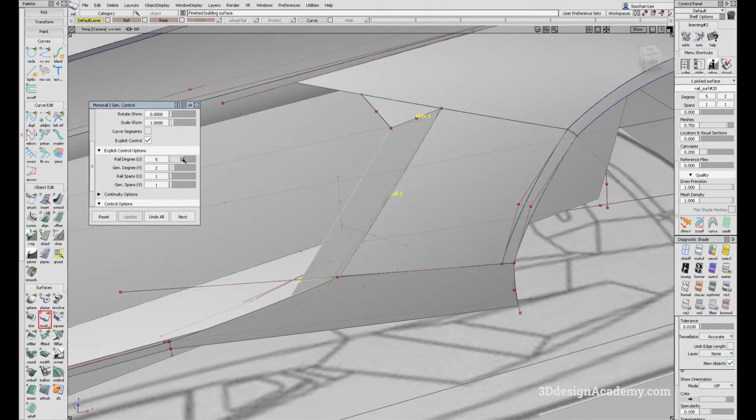So I'm just going to turn rebuild off. I'm going to turn explicit control on, and reduce the gen degree to 2, because that's the maximum degree required since it's created by a degree 2 curve. I'm going to increase the rail degree to 5, and it looks like we achieved position on this one. After that, I'm going to trim this piece over here.

So what I'm going to do is get a rail, just one against the trimmed edge over here, and click on this one over here. Okay, looks like this also has a lot of spans.

So I'm going to do a rebuild. Actually, because we only need it up to this point, I'm going to see if I can do a curve segment and reduce the spans enough. Okay, so it's still degree 2 spans, so I'm going to turn that off and turn explicit control on.

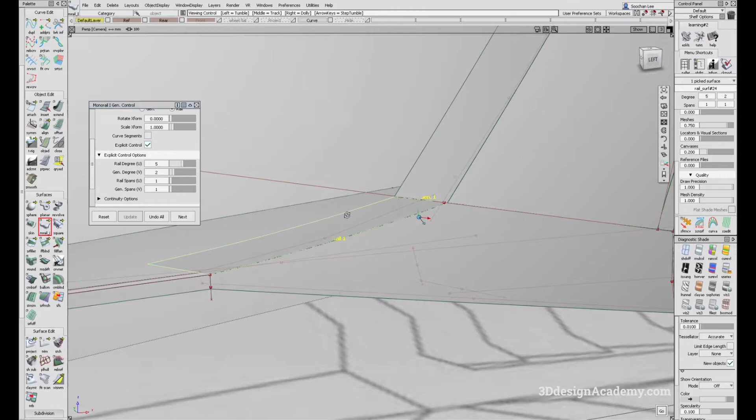If that's the case, I'm pretty sure it's okay to just extend it that way. I'm going to turn curve segments off, and I think the angle is okay. So I'm just going to grab a curve and change this to degree 2 like this.

I'm going to snap a curve over here, create a curve right here like this, trying to match the angle as much as possible. I think there should be a slight crown.

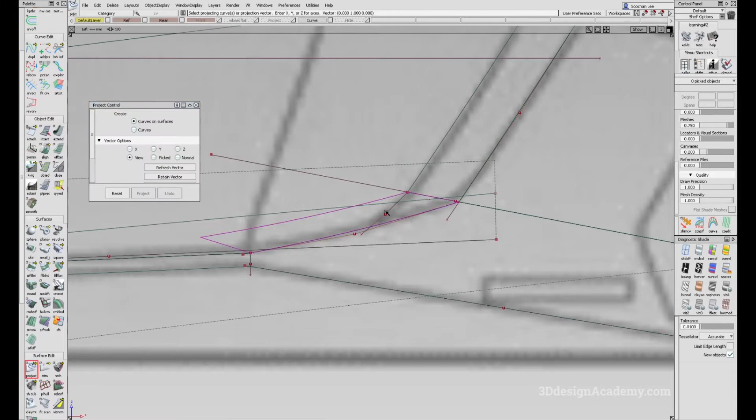Just a minor one. I think that looks good, and I'm going to project like this, and trim. Okay, I think that looks pretty good. Of course we might have to adjust it later, but for now it's okay.

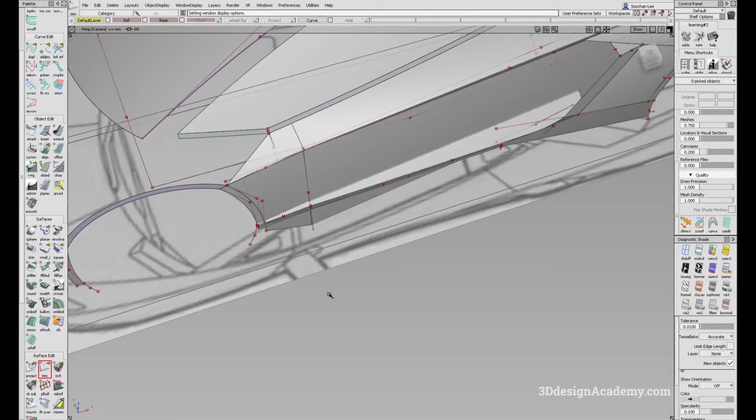Okay, so the next step, I need to create this piece over here. So what I'm going to do is, well, this probably needs to be divided also. This does complicate things a little bit, but I think this is probably a good division point between this surface and that one. So let's try to create a surface there.

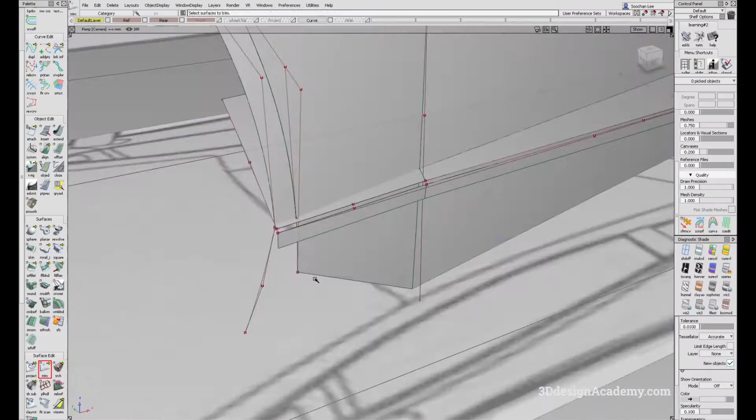Okay, so here's what I'm going to do. Right now we have a curve here that's supposed to mimic the side view, but I don't think I actually need to— actually, you know what, let me just leave that as a projection curve.

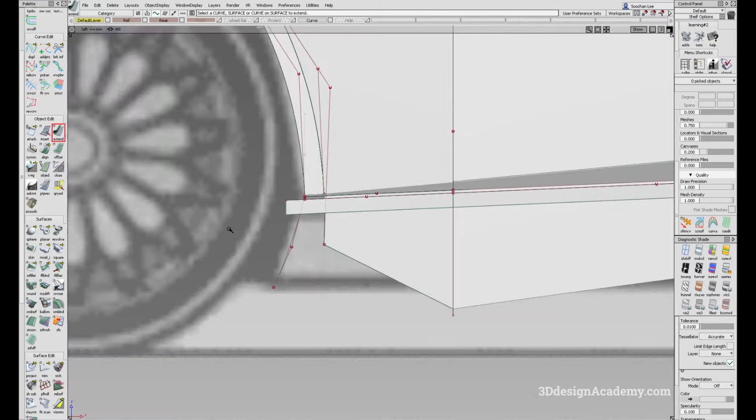So what I'm going to do first is, let's see, I'm actually going to extend this curve just a little bit like this. And I'm just going to project this one like that, and trim. I think that looks good.

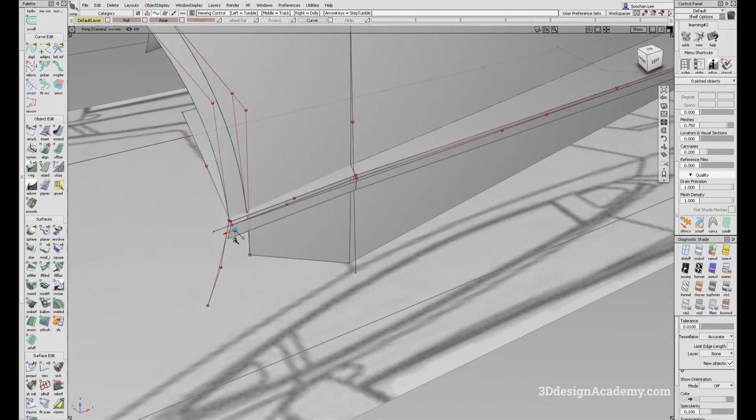And for the next piece, this piece right here, let's take a look at this angle. Right now it's curved in, tucked in quite a bit. So what I'm going to do is, actually, you know what, I'm just going to use this section over here. So right now— oh, actually there's no section over here.

So that's okay. What I'm going to do is create a curve like this. It can be a little bit lower, that doesn't really matter. And because right now there's a little bit of crown on this surface, I'm going to give it a little bit of crown too. Using the stretch tool, I'm just going to tuck it in.

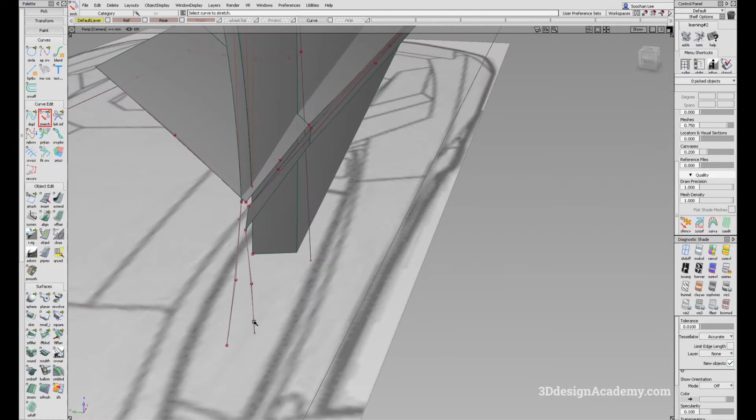Why isn't it working? Okay, so I'm just going to tuck it in like this. I'm just going to create a rail on this piece over here. Right now it's looking okay, but let me just trim these pieces over here so they're not in the way. So I'm just going to trim that one.

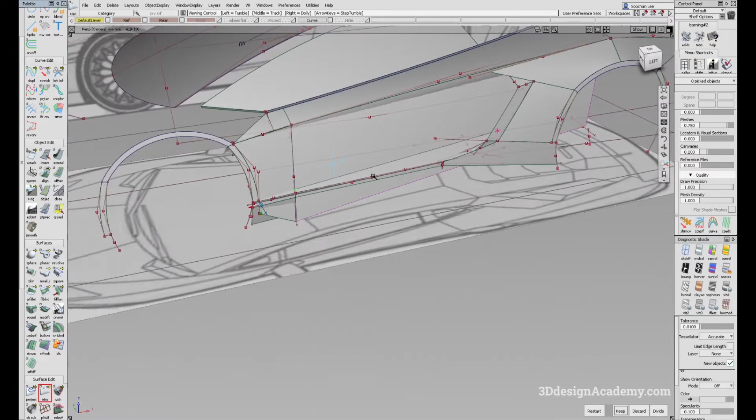Looks like your curve on surface is a little bit short, so here's what I'm going to do instead. I'm going to grab both of these, and there is a curve right here that's behind them. I'm just going to use this one in order to project.

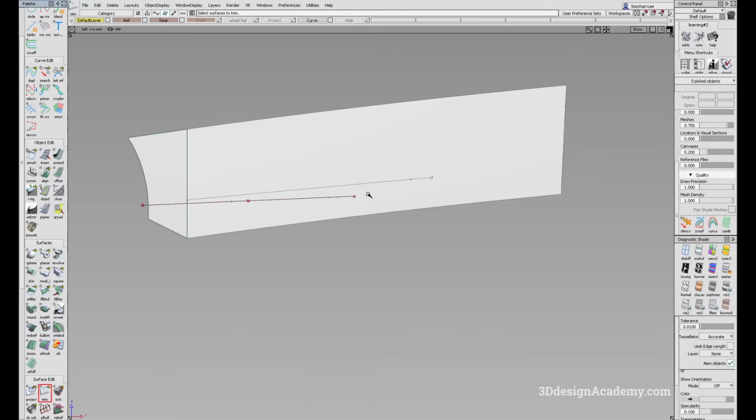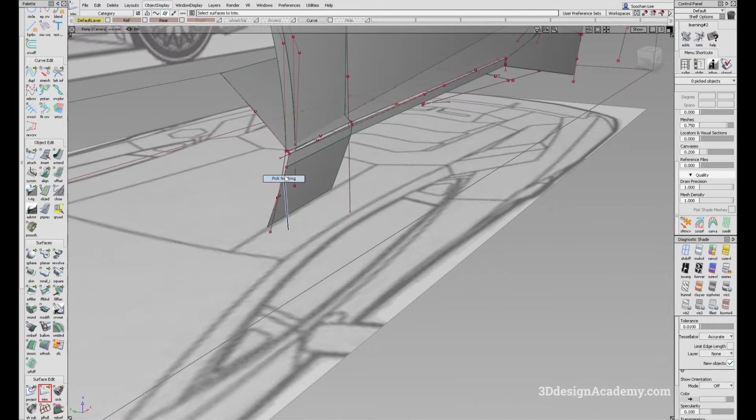And I'm going to trim this piece over here. When I trim, I'm just going to do extend on, selected on. I want to keep the history on this, so I'm just going to delete this one, trim it this way, and I'm going to trim this one also, so that when I'm playing with these surfaces over here, it's not interfering. I think this one looks okay, but I do think it needs a little bit more crown.

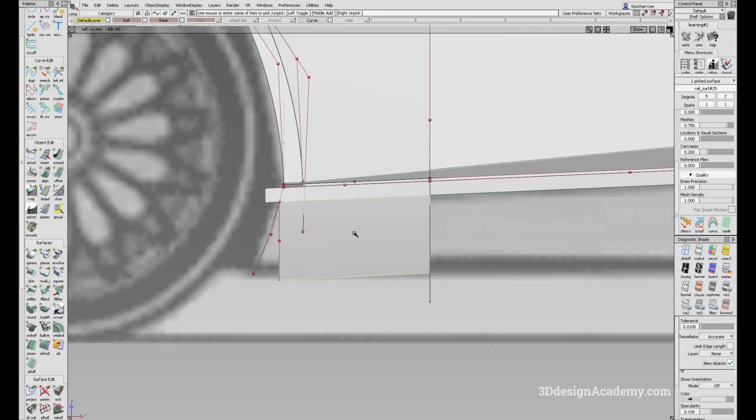So I'm just going to pull the CV out like this. Well, this angle, you might have to make sure that it's working, because right now, okay, so I'm actually going to extend this one out just a little bit more so that we can have history and adjust it as needed.

Okay, so here's what I'm going to do. I just extend this curve over here, and I'm actually going to put this curve, the generation curve, over here, and I'm going to redo the monorail like this.

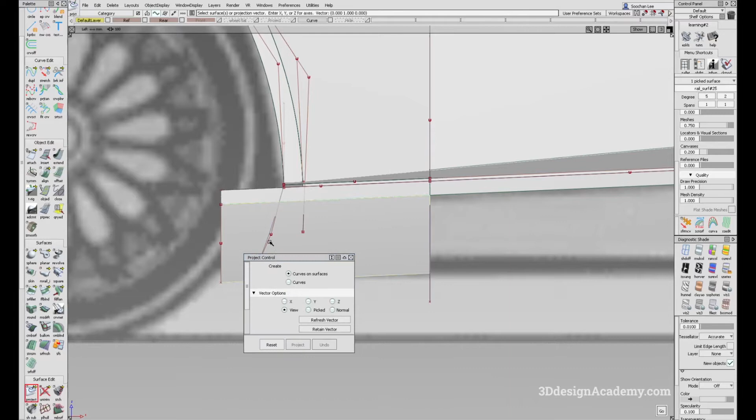What I'm going to do is I'm just going to project this curve over here, and we do have a curve over here, so I'm going to see if I can just create a curve to chop this all off. I think that's mimicking the ground plane well enough.

Let me just do this, and it does look like there's a bit of an angle on the side view, but it could also be because of the drawing. Let me see if I can grab a side view that may show this a little bit better. I'm going to see if there's one that we can take a look at. Yeah, I believe it is all straight, so I'm just going to leave it like this.

Okay, so let me just grab this one. I'm going to project, and I'm just going to trim for now, like this, both surfaces. Now we have history on this surface over here, so we can adjust the angle as needed.

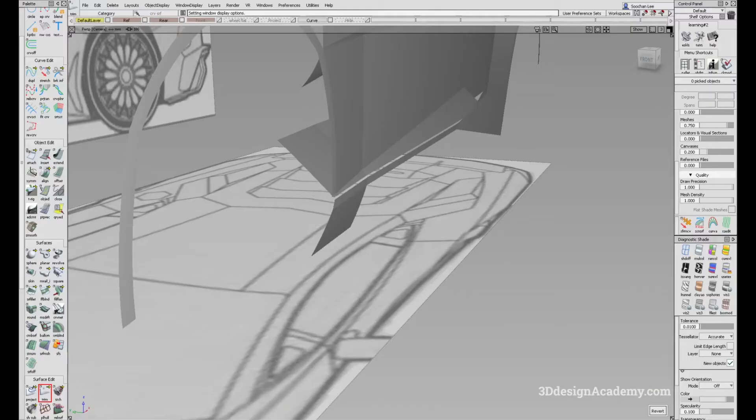Now, looking at the front 3/4 view, it looks like I might have tucked in a little bit too much, so I'm just going to pull it back out like this. I'm just going to compare to maybe something like that.

Yeah, I think I can bring it out just a little bit more. It does look like that this angle and this angle is very similar, so I think that should be a good reference. I think that might be it.

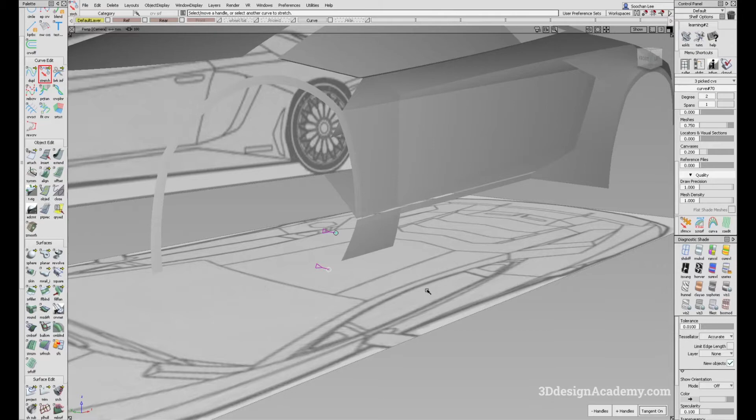Now, I still do want to keep a break because there does seem to be a break over here, so I just want to be mindful of that and make sure that we are getting it as close to the picture as possible. So I would say that's good enough. I might have, just a little bit more, and I think that's pretty good.

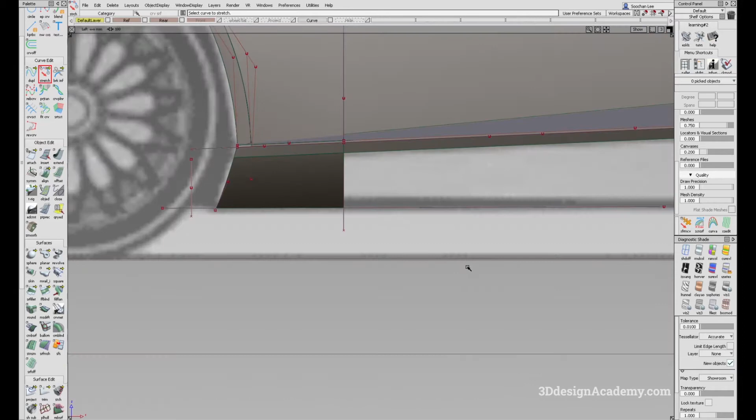Okay, so now what I'm going to do is I probably need to create a surface over here. Let me just go to the rear like this, and I'm going to create a surface using this curve over here, and it's just going to be a rail.

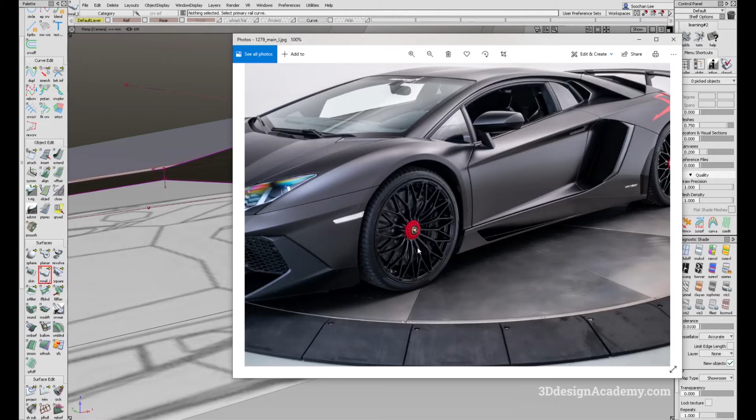It does need to tuck in, but I am not sure if this should be created using a different curve. Let me just take a look at a different image. Now, it does look like it is about the same angle, but that will not allow us to create a crease over here like this. So I think I probably want to

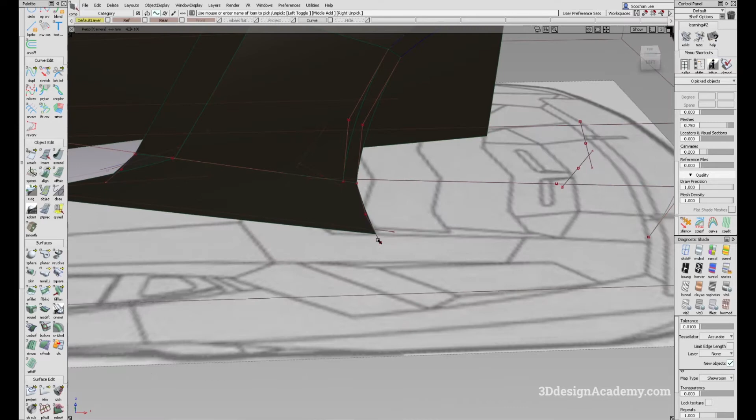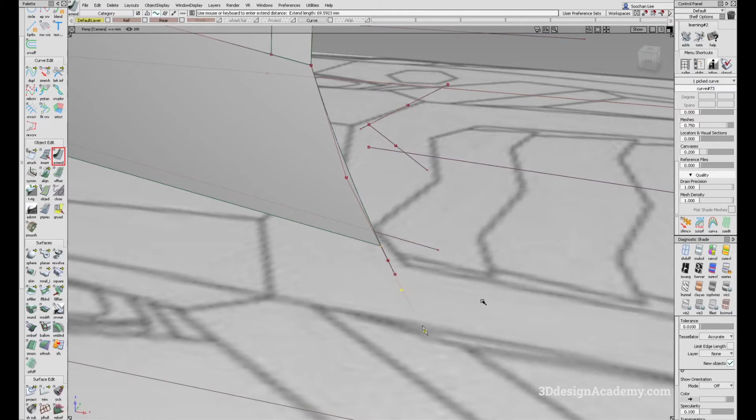grab a new curve. Since the side view needs to be the same, I'm just going to create a new curve like this. I just copy and paste it, and I'm going to extend this one. You want to create the one that was created later, the one that was copy and pasted. I'm just going to extend it back so that we can create a curve here. And I'm going to extend this side because the surface area of this is quite large, so what I'm going to do is I'm just going to use the extend tool to do that.

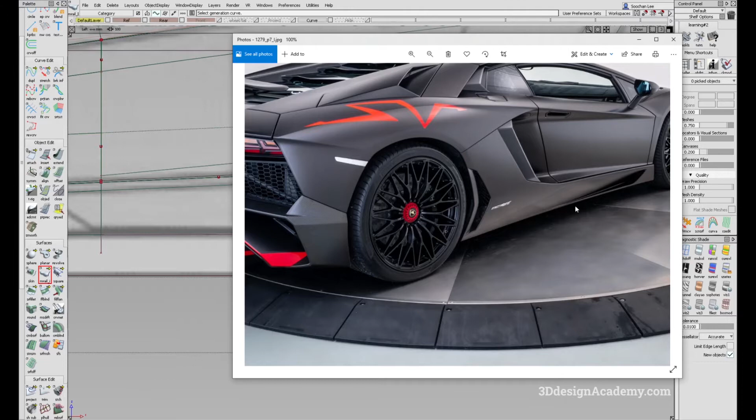Tuck in a little bit, and I'm just going to use a rail like this. Okay, so I think that looks good.

However, we do need to add some more surface details, and I do think it's a little bit short. So what I'm going to do is extend it just a little bit more.

I'm going to project and trim using this curve over here. Okay, let me just turn that off. It created a nice break between this surface over here and this surface over here, so I think that looks pretty good.

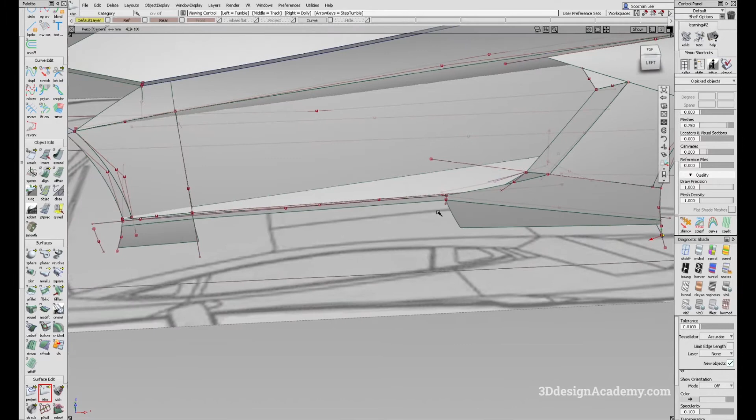I do believe that this is also the theoretical. You might not be able to see it that clearly, but I think there should be a break between this surface and this surface, and the theoretical seems to be running diagonally.

So I think I should be okay keeping this as is, and I'm just going to create a rail like this. Now it does need to tuck in, so let me just take a look. Looks like it needs to tuck in over here.

I don't know if it's twisting in, so I don't know if this is actually touching or if there's supposed to be a different break over here. Let me see if I can find an image that has that detail.

Now this might show. Okay, so right now it's kind of cropped, so I can't really take a look at this area as well. But I do think that this is touching.

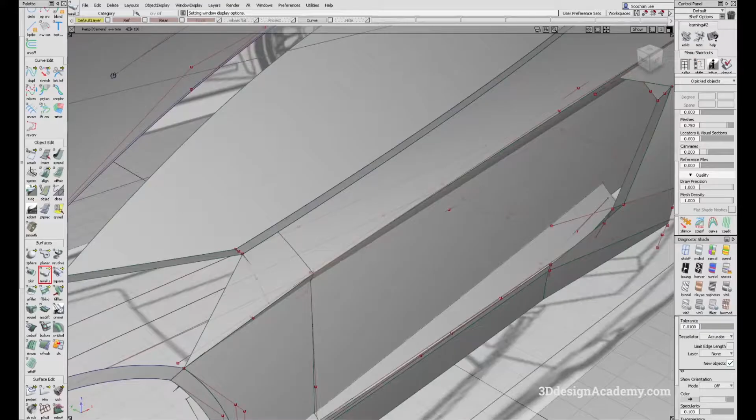So what I'm going to do is just tuck this in, which means that this surface over here needs to be rotated quite a bit. Although that is going to help us achieve a sort of curvature condition, or at least something close, so that this surface and this surface look very similar in angle.

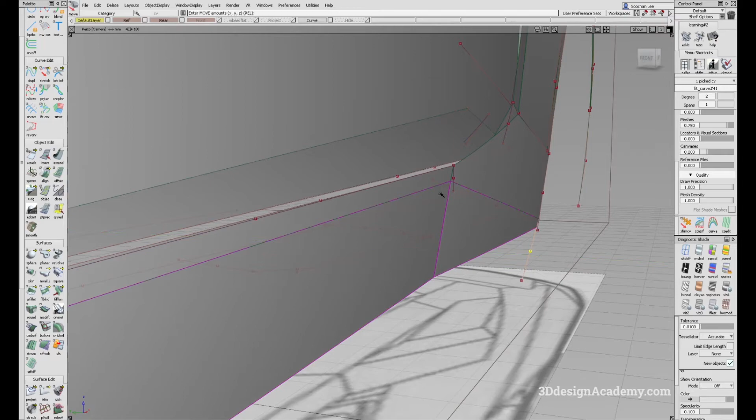Also what I'm going to do is give this a little bit of crown, because I think it looks almost negative over here. Now that probably is due to the angle of this one, like that.

Actually, in order to avoid— well, actually, you know what? Yeah, let's just keep it that way. Okay, so I think that looks good. However, I do need to tuck this in.

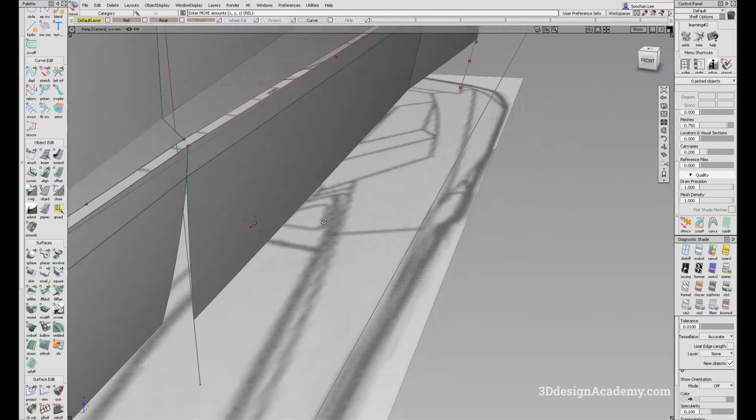So what I'm going to do is rotate this a little bit like this so that we can tuck it in. Looks like there's a little bit of angle difference, but I think that should be okay, and we are getting a nice section over here.

However, since we do need history over here, I think I'm going to approach this a little bit differently. So what I'm going to do is duplicate this curve over here, and extend it a little bit so that we can retain history and also make sure that it's the same edge.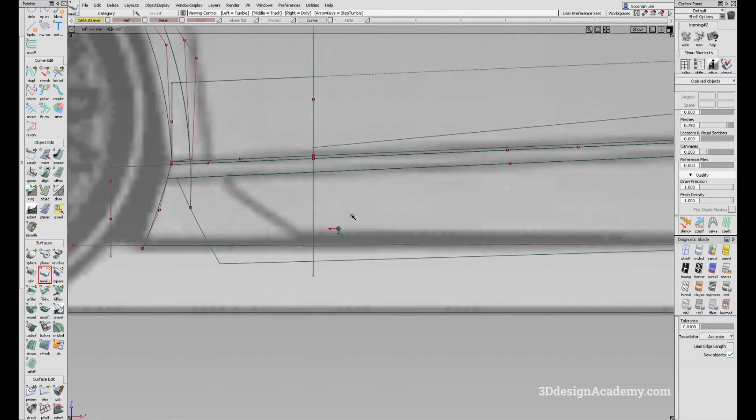So I'm just going to do a rail again, rebuild it like this. Now it's extended all the way, so that provides us a better control.

Also what I'm going to do is project this one over here. Let me just take a look at this. Okay, so it looks like there's a little bit of thickness, so I should be aware of that.

And I'm just going to trim this piece over here like this. I'm going to copy and paste this one, and lift it up just a little bit so that we can take care of this one over here.

So there needs to be a little bit of thickness. What you want to do is just raise it up a little bit, and I'm going to extend it back, extend this one, and project.

Oh, actually, before I project, I should actually merge this one. Well, I think here's what I'm going to do.

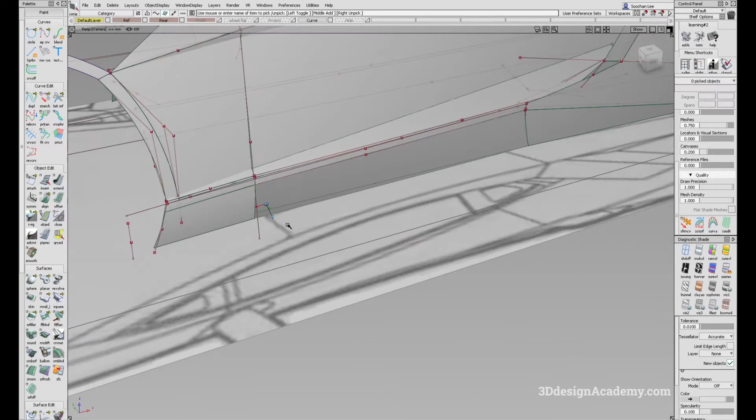As much as I would like to make this one piece, there's a section break here anyways, so I'm going to take advantage of that and create a new curve over here. In order to do that, I am going to do a fit curve over here like this.

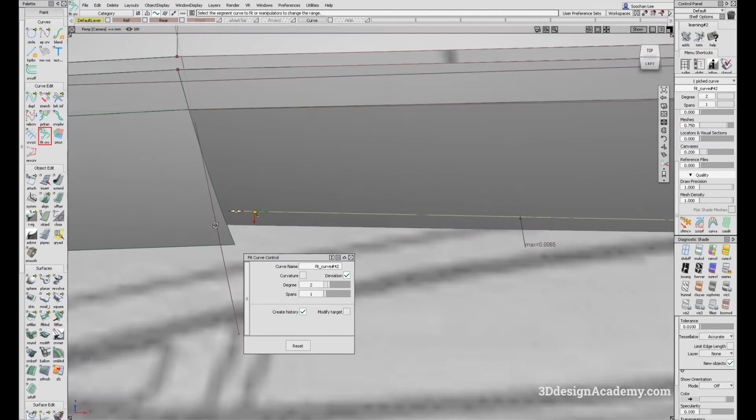I'm going to just make it degree 2, it should be enough. Let's see, I'm going to go back to the side view, and snap it over here, and use the stretch tool over here like this, and snap it here like that.

And now we can create a section over here. Now looks like this continues on for a little bit. Let's see.

Oh, it's not a lot, but I think it's at least touching over here. So what I'm going to do is—yeah, I think that should be okay. Well, we'll see.

Okay, before I continue though, let me just trim this off first. So looks like this should be the section break, and this should be the angle that we're trying to keep. So what I'm going to do is—well, it looks like it's a little bit off.

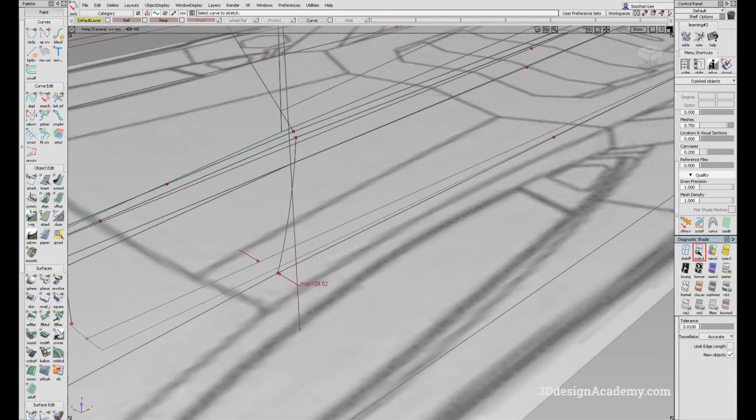Well, I prefer to keep everything the same. So I think I'm going to move this back just a little bit towards the back of the car, and I'm going to change the angle a little bit so that it's a little bit more parallel. And what that does is it allows us to get this a little bit closer.

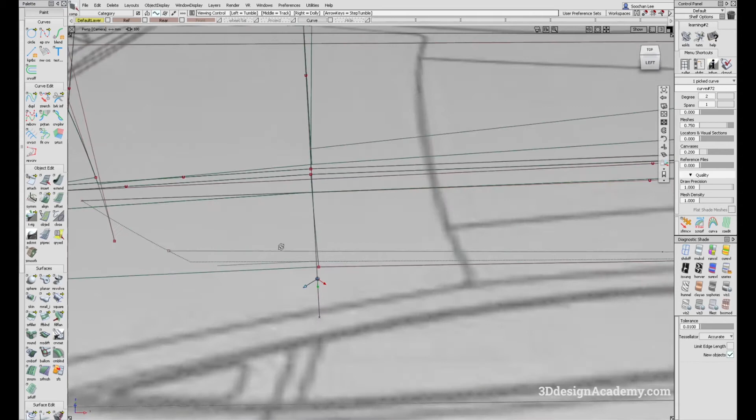In order to match this a little bit better, what I can do—oh, actually this curve I cannot change. Okay, you know what, I know it's a little bit off, but I think it should be okay. So what I'm going to do is project this curve over here, and snap this curve over here like this from the side view. I'd say it's close enough.

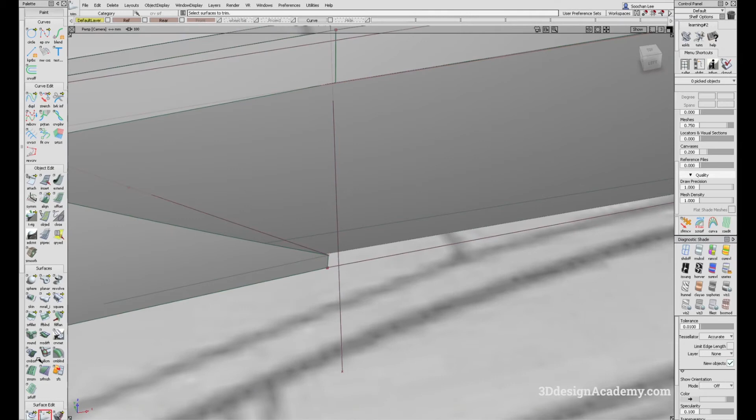Maybe I'll just use a stretch tool to angle it a little bit more, make sure that it's parallel. I'm just going to project over here and trim the surface over here. And now let's go ahead and do a rail over here like this, and take a look at how it intersects over here. Okay, so I do think that the angle may need to change a little bit. I think it needs to.

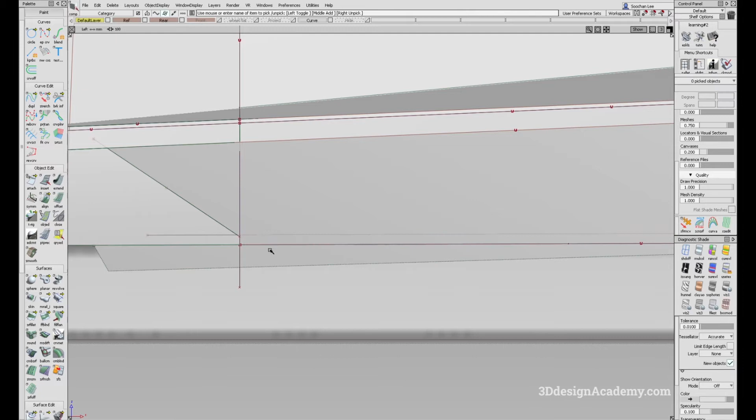I also think that maybe the thickness is a little bit too much, which means we can actually make this a little bit thinner. And the surface over here, let's see, I'm just going to grab this one and snap it over here like that. Although I think it could be a little bit thinner.

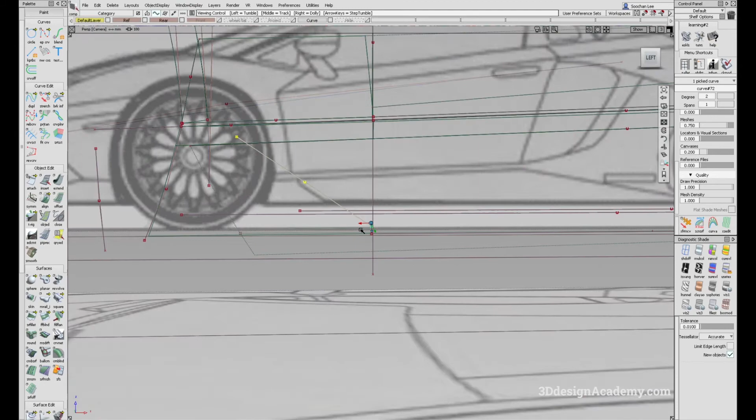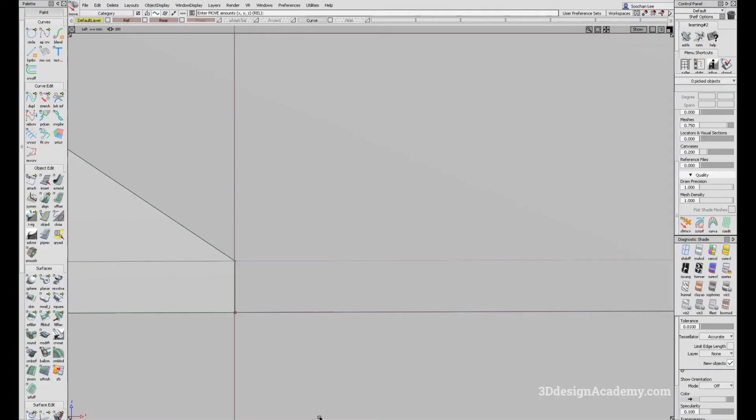And let me just move this curve back down over here like this. Now I know it looks like it's ending somewhere here. I don't know if this is a reflection or if the angle needs to change. I don't think I'm going to make two breaks. So okay, here's what I'm going to do.

I'm just going to keep it here and use a bi-rail. Actually, if that's okay, we can always trim this also, so let's do that instead. What I'm going to do is snap a curve right here, and angle this one a little bit more so that it goes back a little bit.

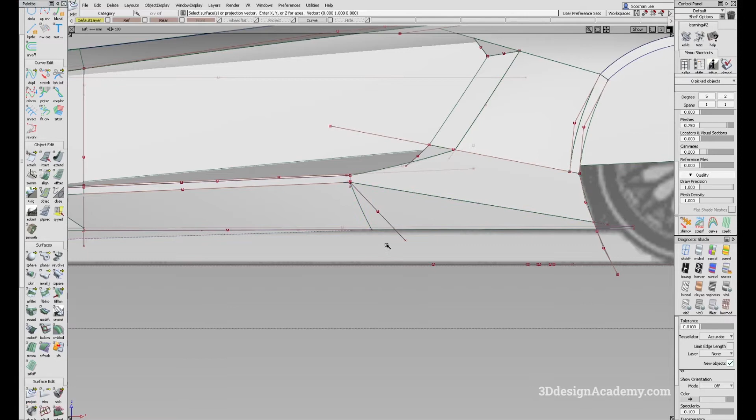I'm just going to project this surface over here and trim this one. That's going to be the beginning of a new surface—it's going to act as a gen. And I'm going to just snap. Yeah, I think that looks pretty good.

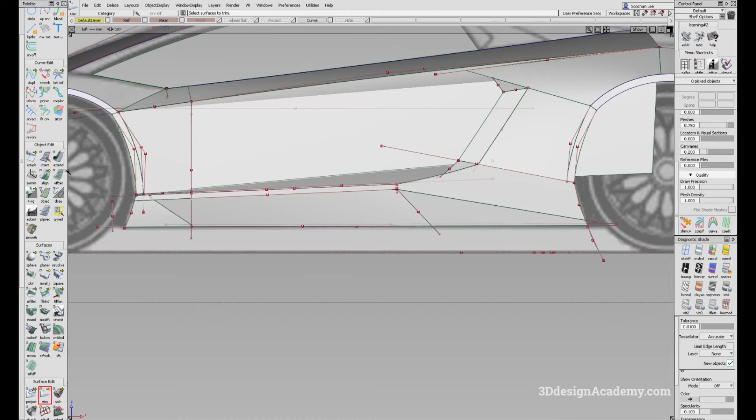Let's go ahead and trim this piece over here, like this. And I'm going to trim. I'm also going to use the stretch tool to snap this curve. I don't know why it's not using the stretch, but that's fine—I'm just going to snap it over here like this.

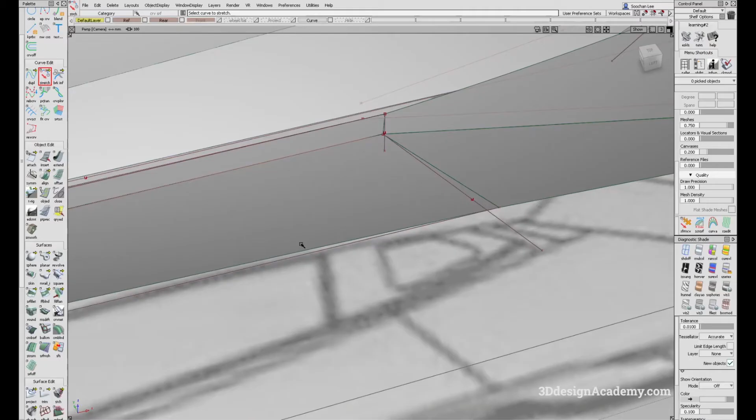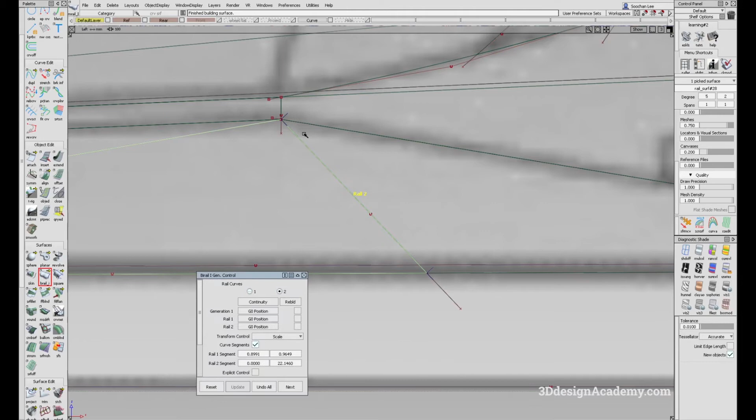Now I know it's longer than necessary, so what I'm going to do is go back to construction history. Explicit control, I don't think, needs to be on. And I'm just going to use the curve segment over here and snap it right here like this, so that we get a nice even thickness running along the lower.

Okay, so I think that looks pretty good, and I think I'm going to create a curve over here for the inside surface here. I'm just going to use a stretch tool like this and bring it up.

Now, there should—well, actually I'm not sure. I don't know if there's supposed to be a crown or not, but it's good practice to do so, because no surface in Alias or automotive surfacing should be dead flat. So I'm just going to give it a slight crown, even if it's just a tiny little bit.

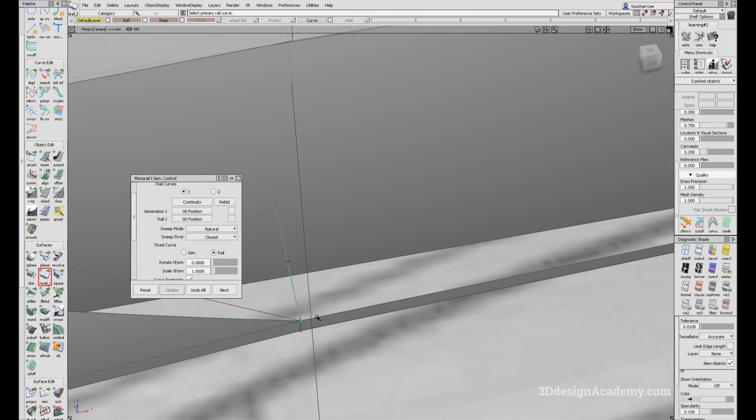And I'm just going to do a rail—again, it's just going to be one and one. And this one, I'm going to turn rotation off like this. Okay, so I'm just going to do this over here. I think the intersection looks pretty good.

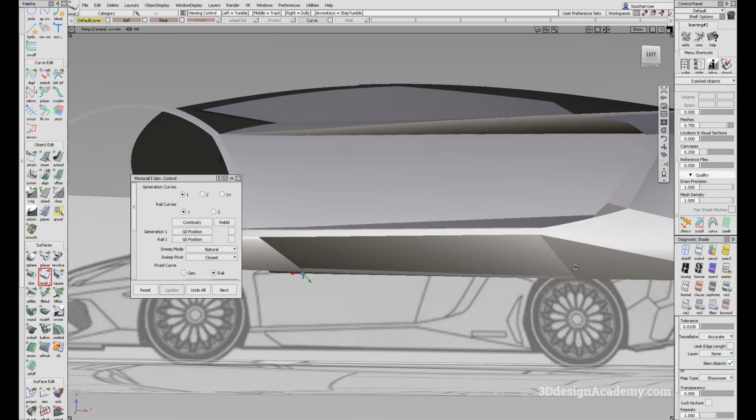Although I think it needs to be either deeper or it needs to move up. So let's go, actually from this angle I think it needs to be a little bit deeper. So let's do that. But before I do, I just want to make sure I know there's a little bit of crease here, but I don't want to make it too severe.

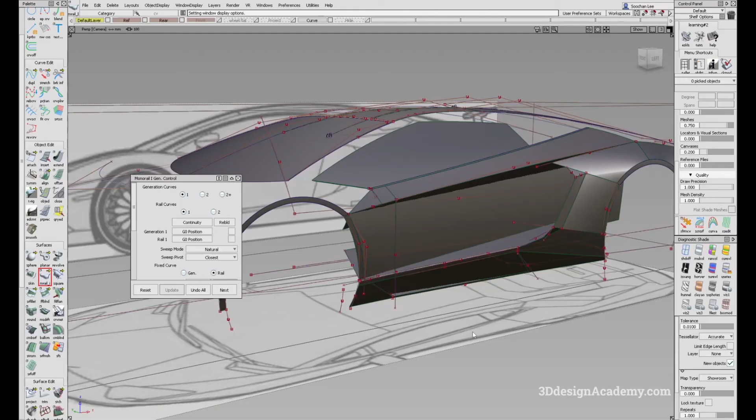So let's go ahead, I know it looks very flat over here, so I think I probably need to do a blend between the two. Now, I don't know how this corner is going to turn out, because right now the transition here seems pretty sharp, whereas the surfaces themselves seem to be continuing nicely. So I probably have to put a big fillet here, but we'll see how that goes.

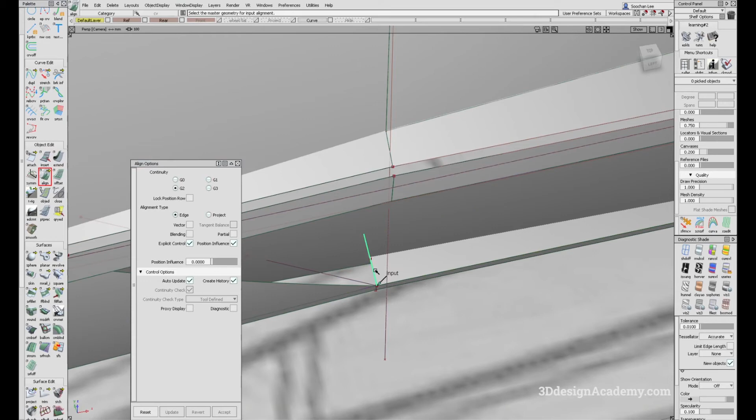Now, it is missing surface over here, and we do need to take a look at that and how it intersects. So I'm just going to extend this surface with merge off, and I'm just going to do an align, it's going to be G2. And when you extend the surface, you want to make sure that this surface is actually degree 2, so that whatever this surface does, everything is going to be translated into this one. You don't want some loose CVs hanging out over here, so you want to make sure it's degree 2.

If it's not, you want to change it. And now it's got a surface as a continuation of that. I think that looks pretty good.

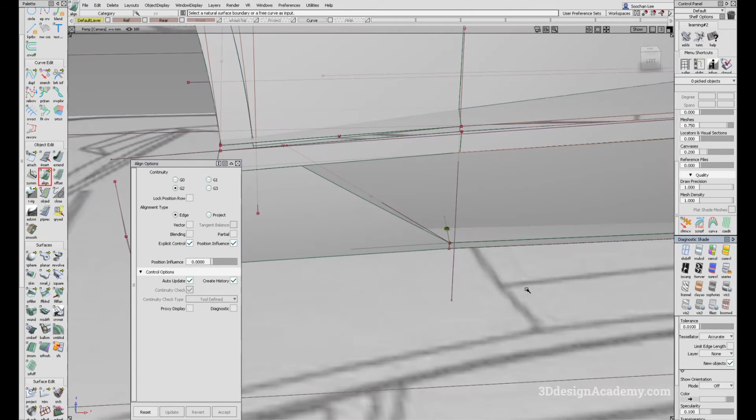However, I do think that this one needs to be rotated inboard a little bit more. So I'm just going to do, I think right now it's -18. It doesn't look too bad.

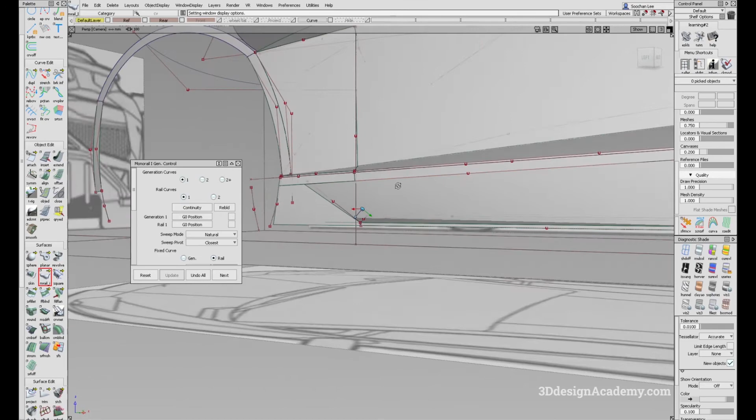However, I do think it should be a little bit deeper. Well, actually, I'm not quite sure. Well, I think it actually looks pretty good. Okay, so maybe I'll just leave it like that. And we got a nice section over here.

Now, there does need to be a little bit of thickness over here, but I think I'm going to leave that detail for a little bit later. I know there's a break here, but that we can address later as well.

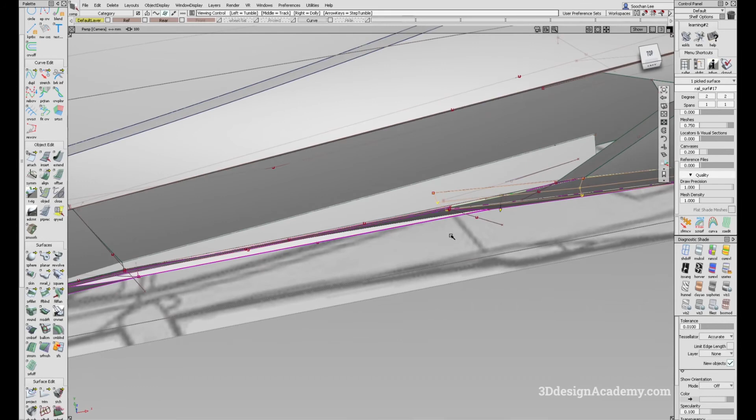Now, if you do want to make this a little bit smoother, what you can do is you can just expand this out. However, it does need to be straight over here, so maybe I'll just leave that as is.

Yeah, I think I'm just going to try to use the highlight as much as possible. Not a highlight, a fillet, a generous fillet, to make this as smooth as possible.

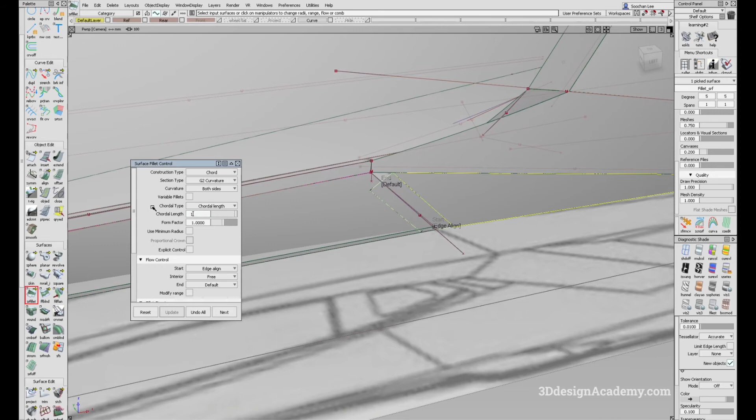Actually, let me just take a look, do a little bit of a test. So what I'm going to do is I'm just going to do a G2, and I'm going to do a radius of 50 to start. And I'm just going to make sure that this is edge aligned, and I'm just going to extend. Actually, you know what? Let me just do it. I think that's too small, so I'm just going to make it twice the size, 100.

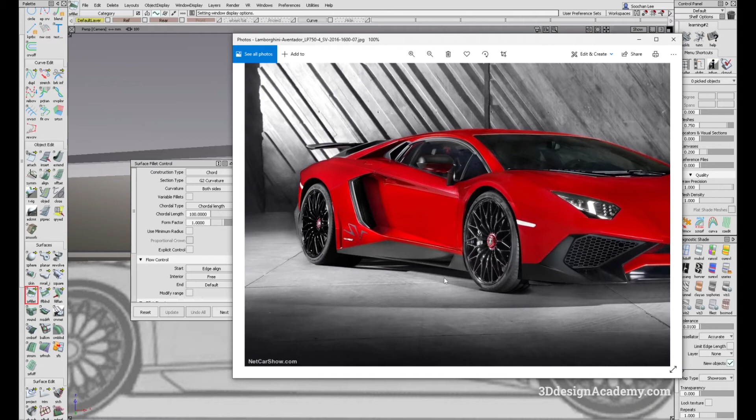Now, with the reflection, it does look a little bit, wow. So here's the thing, I don't think I'll be able to find an image where it shows this detail, because as you can see over here, it's usually dark, so I don't know how the highlight is supposed to travel with this one. Maybe this one shows a little bit better. No, not really. Okay, so if this is the case, I think I'll just leave it like this.

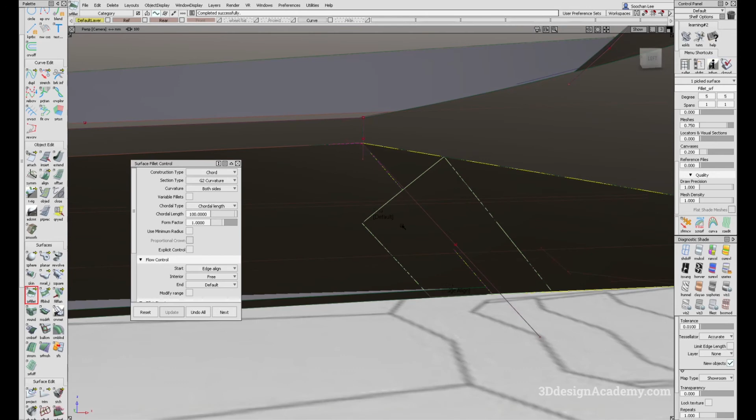However, the edge, this does end up with a point, which means I cannot do an edge align. So if I were to do an edge align, it's going to give me a round point, which is not what we want. So what we can do is, well, there are several things that we can do, but I think the easiest method would be to just leave it like this.

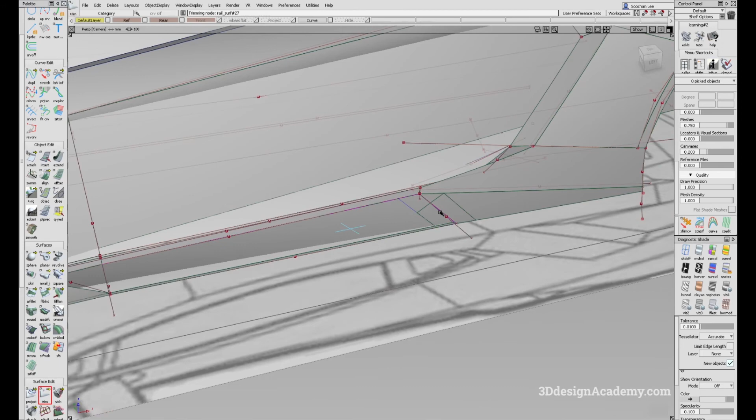And now this, I should probably leave it for later, but let's just cover it up. So here's what I'm going to do. I'm just going to extend this carbon surface over here like this. Now this is a little bit more advanced technique. I'm just going to trim this piece over here, and I'm going to trim... whoa, what happened?

Okay, so if that's the case, let me just undo, and I'm just going to make sure that everything is okay. I'm just going to delete the construction history over here, and I'm going to have to redo this.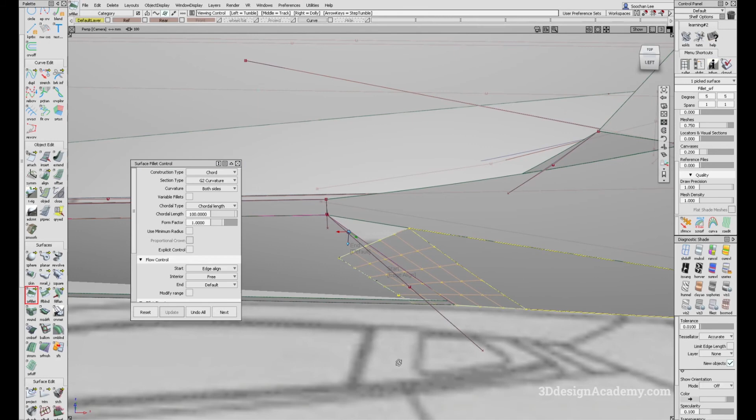Okay, so I'm just going to do a surface fillet. That looks good. The CV structure is okay. Actually, I'm just going to make sure that the CV structure is good by doing Bezier. That usually ensures you have a very good CV structure, and even though it might look good when you extend it, it does tend to create some problems.

So after that, I'm just going to extend this curve and surface over here like this, and I'm going to trim this piece over here. In order to close this off, I'm just going to use a square. It's going to be 1, 2... oh, is it not?

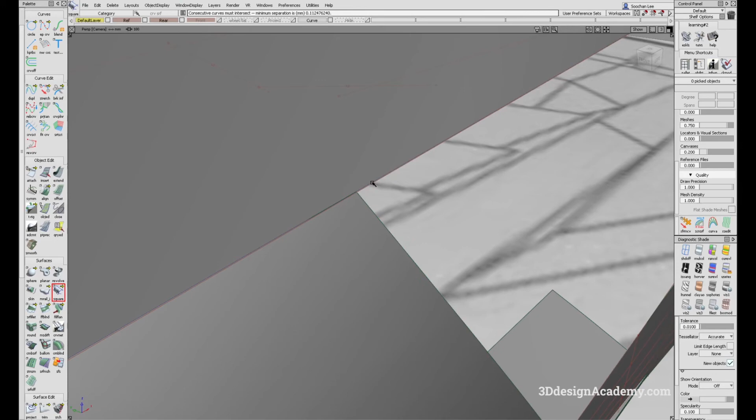Why is it not making a square? That's weird. I personally don't think that there's a gap, as you can see over here. And when I zoom in, I don't see any gap. So I'm guessing that Alias is doing something a little bit funny.

Okay, so if that's the case, what you can do is you can just duplicate this edge. I'm going to just extend this back like that. Oops, what's going on? Let's just turn merge off.

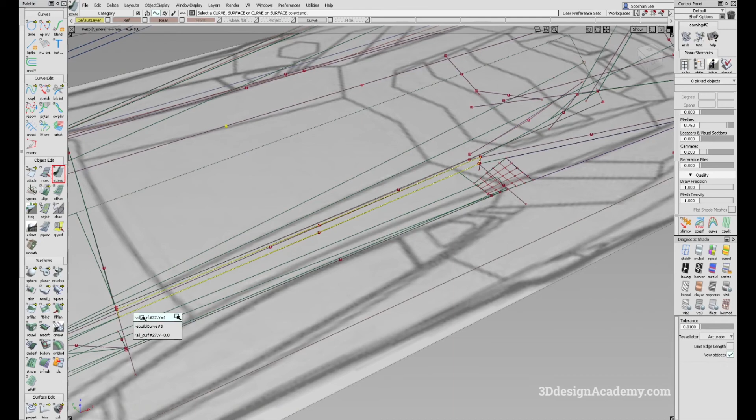I'm going to extend this curve back, and you can use the edge of the curve. See, I don't know why Alias does this, but sometimes it does. In order to overcome this, you can just create a new curve. Usually duplicate curve works, and you can use that to make it the fourth edge.

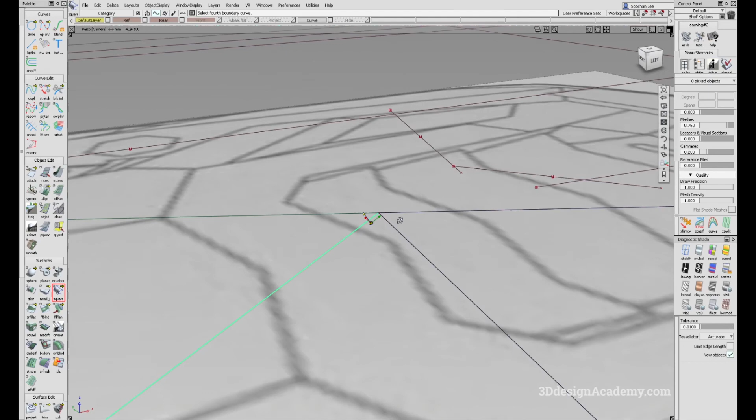And it's doing it again. Now this one, I don't think there's a gap either. So let's find out what is the problem. In order to find out which side is not matching, you can always...

Because the square tool has to be going in one direction or the other, let's say you pick this one first. Then you'll see that I was able to pick this, which means there's no gap between these two. I'm going to assume that because this worked, this is the problem, but looks like it's not.

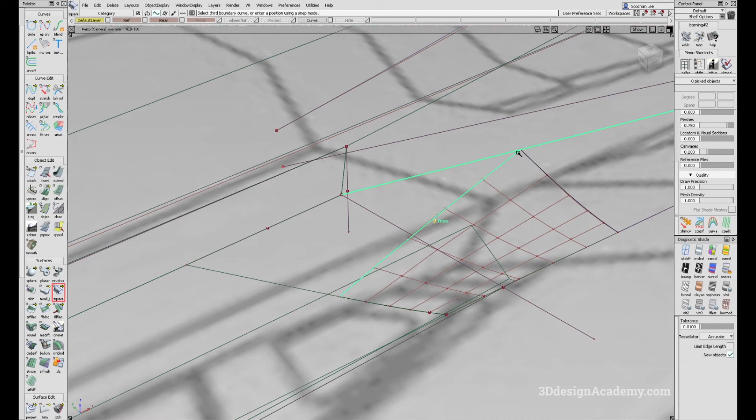Oh, well, there we go. We were able to make a square. Okay, so that is good. So now I'm just going to make sure that the continuity is good as well.

So I'm just going to make this curvature over here, and I'm going to make a curvature, and I'm just going to see how much the CV moves. It's not a lot. Oh, actually, there was only tangent.

So let me just turn that back on. Curvature, you'll see that there's a little bit of CV movement over here. And you'll see that these are stationary because they're not affected by anything.

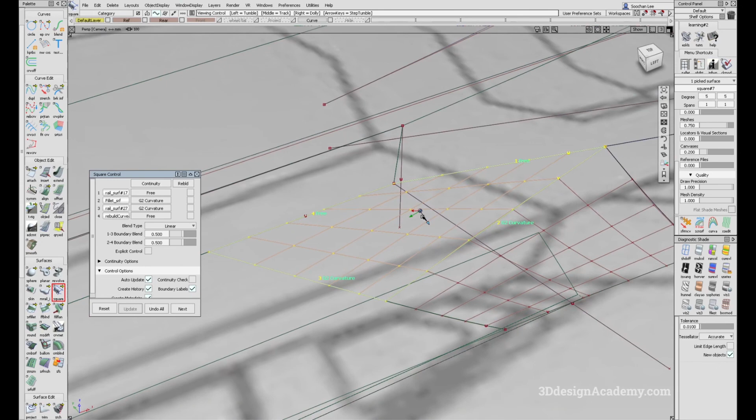So in this case, what I like to do is leave a 2 as a free boundary, and I'm going to use just the G2 curvature over here like this. And I'm going to do a vector because right now the angle on this is not right. So I'm just going to use a vector.

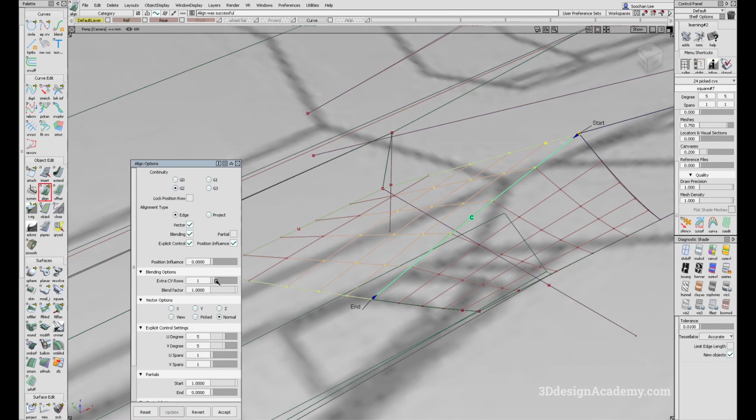With the vector, I think I'm just going to place it in normal. And in order to transition these nicely from the changes here, I'm just going to do a blending on, and I'm going to do extra CV rows of 2 so that these 2 rows of CVs also has a nice transition from here to here. Blend factor, well, it's kind of hard to see because the movement is so subtle.

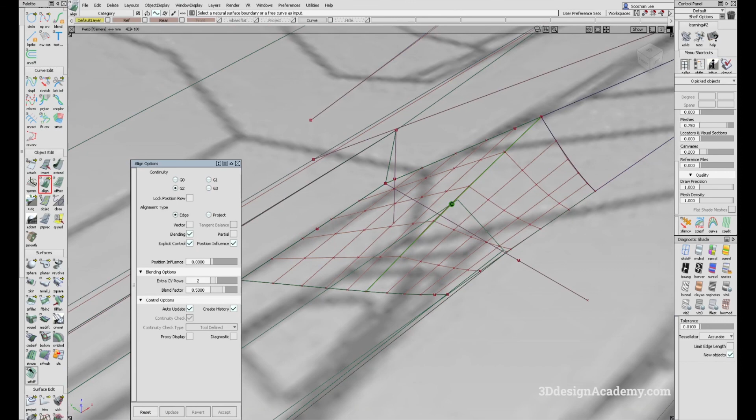So I think maybe I'll just do maybe half, 0.5. I'm just going to make sure that the continuity here is good as well and retains curvature. So that is excellent. Okay, so the highlight, okay, so here is the problem.

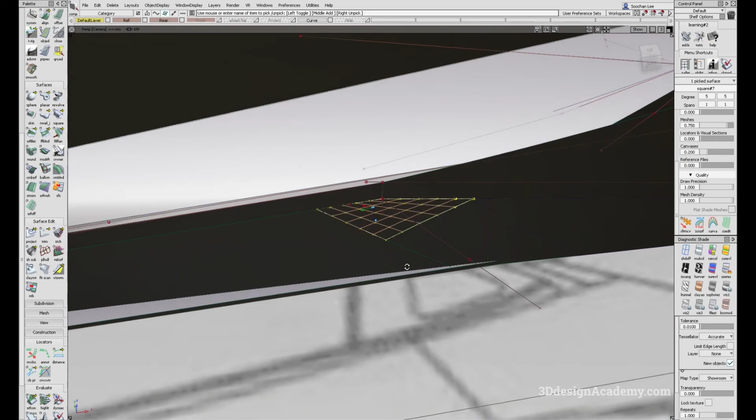So this is the problem. Okay, so if this is the case, I might have to find a different approach in order to do this. And it might involve pulling this out, but this definitely needs to be addressed because right now this is not a condition that is desirable.

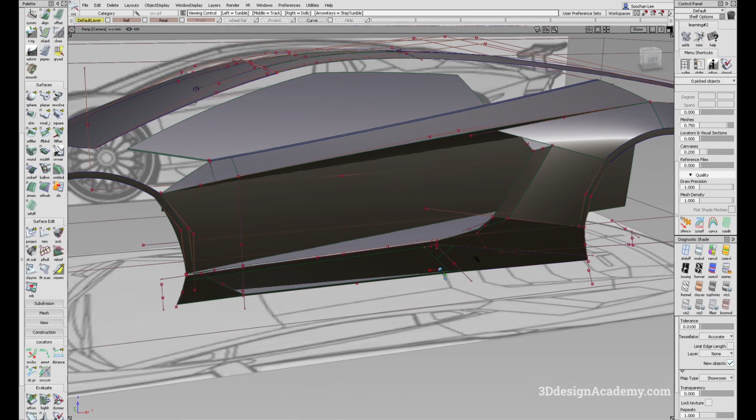I might, unfortunately, have to make some adjustments, but that's okay because that's what Alias and surfacing is all about. So I think this is a pretty good spot to stop.

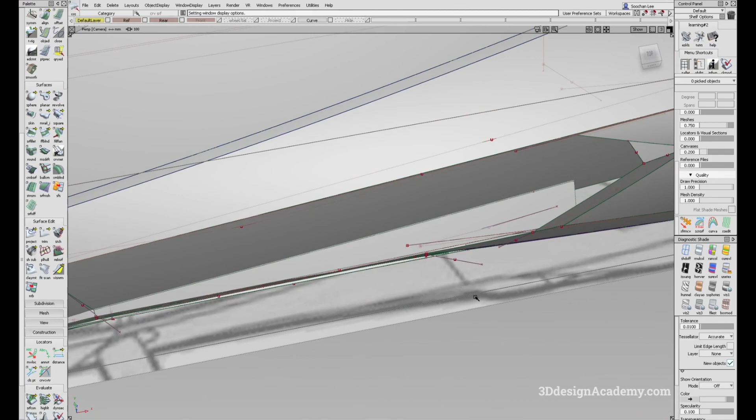We will pick this up in the next lesson, and I'm going to show you guys how to make this a little bit smoother and this a little bit flatter so that it has a much better transition than this one. I think one of the things that I might want to explore is pulling this edge out, which will make this edge transition a little bit smoother, and as a result I might have to pull this surface out as well. But that should be in the next lesson.